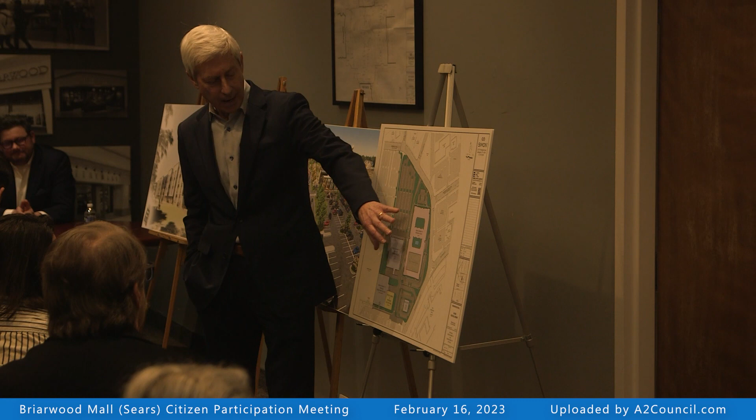So that is our concept. Pretty straightforward, but we're really excited about bringing these new uses to the mall, and we think it'll be a good complement for the property, and we think it'll be good for the community as well.

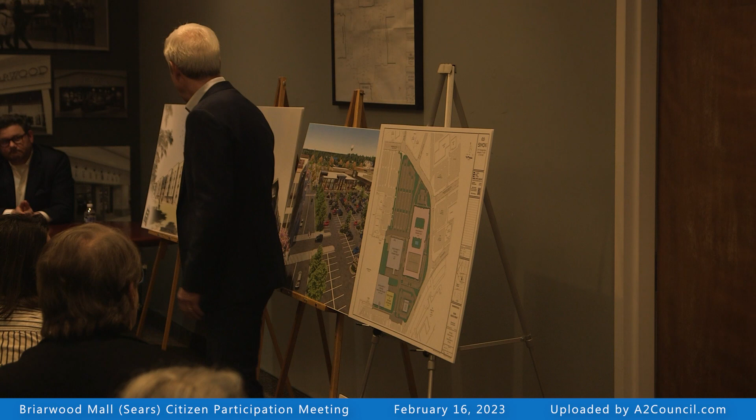What we'd like to do now is just field your questions, and we'll answer them as we can. Some we probably won't be able to answer, but hopefully we can answer most of them between Brad and I and these guys.

As a Hines representative here, we're a developer. We develop multifamily all around the country, and we're excited to partner with Simon on the multifamily piece. So just kind of high level, the grocery and the large format retail, that's Simon alone, and the multifamily development is a joint venture between Hines and Simon together. So wanted to give you a little bit of context there in terms of our relationship.

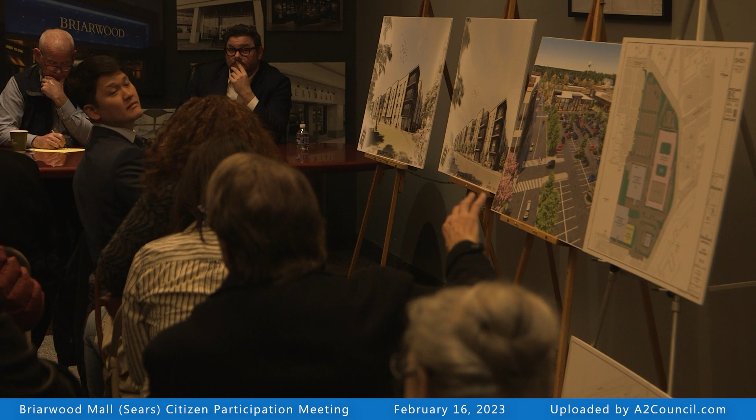Thanks, Brad. The area that's going to be residential is currently zoned parking. What zoning will you seek? We will be seeking the C2B zoning that the mall building is currently that zoning classification. And there's a little flag out to the ring road that's also that classification. So really, it'll be just an expansion of that classification and will reduce the parking designation.

The one change to the traffic that is recommended is as you exit Briarwood Mall on Hilton Boulevard, right now there's two exit lanes, and it merges down into one before you hit State Street. What's contemplated is to create another right out. So instead of one right out on State Street going south, it'd be two rights out on State Street going out, to try to relieve some of that.

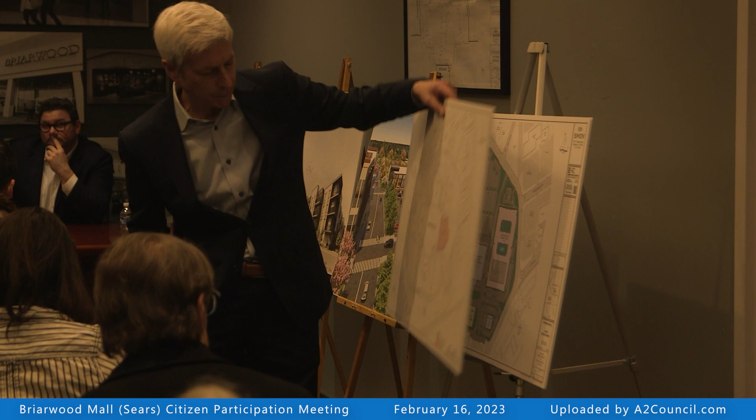So right here, as you're going eastbound on Briarwood Circle, there's two lanes that merge into one, and we're gonna create a second right out here to alleviate some of that wait time there.

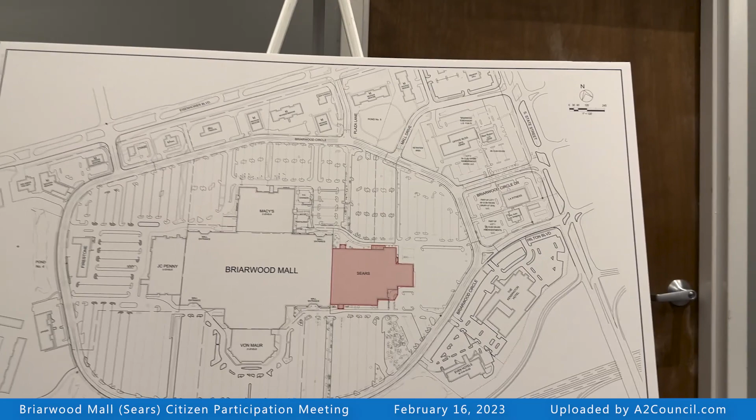What's the car volume you think is coming into the mall? Right now, the struggle is with where Kensington is and where the Mexican restaurant is. At Christmas time, those cars are backed up. Any given night, if you stand out there, they're backed up past where the original Sears entrance was.

So now you're gonna add in, I didn't hear the first part of how many homes are gonna go in, you're gonna add in large retail, restaurant operation, and so on. And with State Street now being bottlenecked the way it is, there's gotta be some correlation, or somebody's working with them to change the entrance and exits of State Street. Or else the traffic coming into the mall is gonna bottleneck, even just getting your own customers in, frustration points, or not frustration points, but critical path.

Yeah, we hear what you're saying, we'll address that, and we have a traffic report which will be available. But we feel, the report says, and we feel confident that the level of service will be substantially the same with that one modification.

Questions? Actually, a couple of questions that are sort of interrelated, and I think impact on the timing of this. There's the Sears parcel. Who owns that now? And the parcels that you're looking to develop, will they be split, or are they already split? And further related to that, I assume the whole mall parcel project is subject to some kind of declaration or reciprocal easement agreement, and what kind of controls do the other owners have for the Mother May I that you'll need to change the uses here?

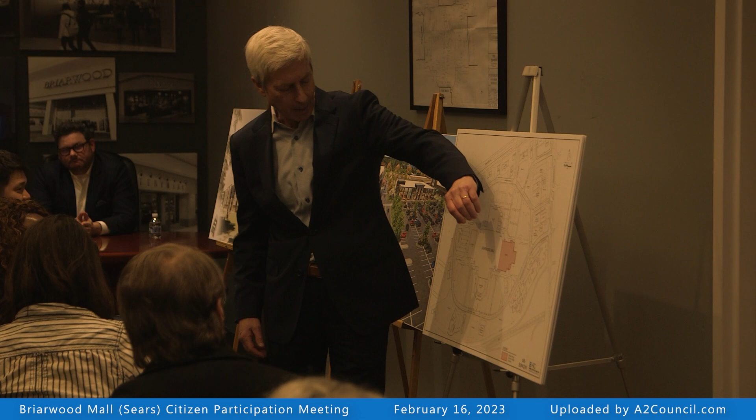There's several property owners on the site. Simon owns the mall building, and now the Sears building and tract. We own some property down here and some property up here. Macy's owns a parcel, Penny's owns a parcel, Von Maur owns a parcel. And then the mall entity owns a parcel.

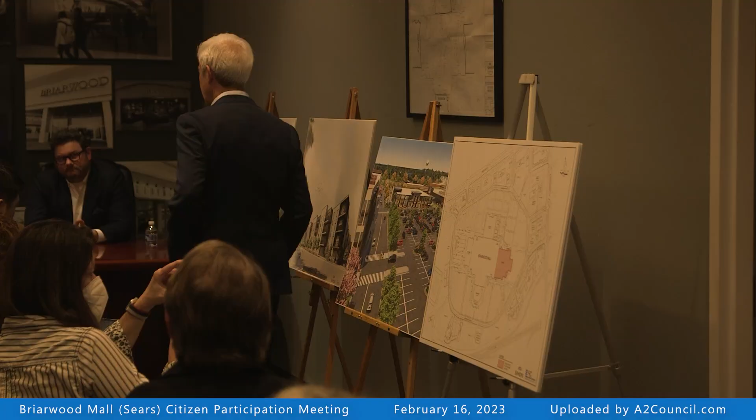So there's a lot of property owners, and you're right, there's a reciprocal easement access agreement in place, where we will have to go to the department stores. We're in active discussions with them now, and everyone wants to see this happen, right? Because this has been vacant for several years. So we will have to work out those private contractual things with them, but that's something we'll be working through while we're working through the entitlements for this project.

So hopefully the other owners have kind of reached the pain point where whatever you might have to cross their palm with would be lowered or go away. I mean, that's all. Yeah, so Simon has a lot of malls, and we've got these same folks in a lot of our malls. So it's like a three-dimensional chessboard, it all gets worked out in the end.

And I think you also asked about the timing of things. So assuming, we're starting our entitlements tonight with this meeting, and then we'll get your input and provide feedback to the city when we submit a site plan application. But we're hoping to get through the entitlement process, which is the site plan application and the rezone, by the end of the year. Don't know if that's optimistic or not, but we think it's realistic.

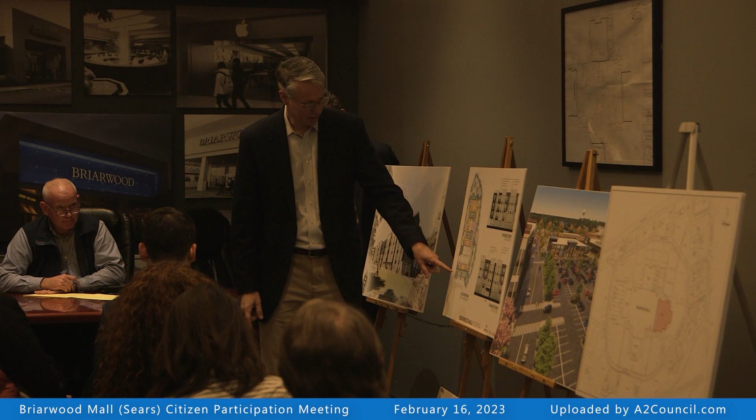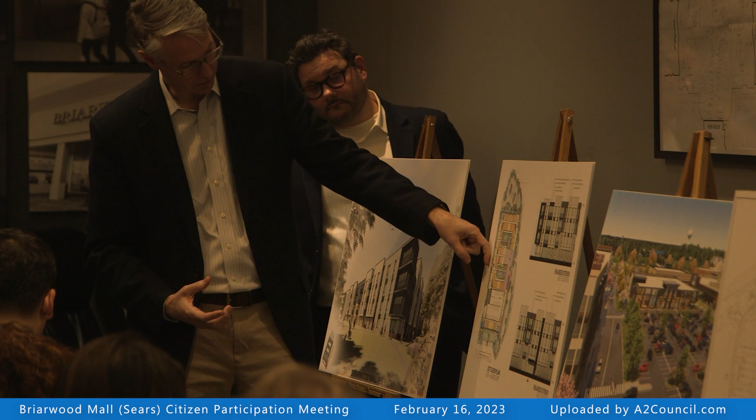We're focusing a lot on our landscape architect, on the green space and the experience. Obviously we're here next to a mall, next to the ring road, and there's a lot of automotive traffic, so we want to make sure there are great walking paths and access for pedestrians as well as bicycles. We're contemplating a bus route, thinking about how Ann Arbor Transit supports the mall area so it's thoughtful in terms of the route they take—we're talking about a bus stop between the grocer and the multifamily. So we're trying to think about all modes and all ways folks will use the site and the development, and just being thoughtful about that.

As to the residential, so it's apartments, not condos. Correct. And it's geared toward multifamily as opposed to student housing, which we've seen a lot of in the central core. Correct. And what are the general sizes of the apartments and the price points?

Lastly, have Simon and Hines done anything like this together before? Good question - it's the first endeavor, isn't it? I think it is officially. We have a couple of different projects around the country we're working on, but yeah, this is the first. Simon's doing this in a lot of our malls now, rather than replace a department store with another department store - that universe of available department stores is shrinking. The guys that lease the mall now are saying they don't want more of the same, they want something new and a little more dynamic.

We've done this in a couple places, but where we have available inventory of vacant anchors in the market, and the market's there for it, this is the way we're going pretty much. Any idea on price points for rents?

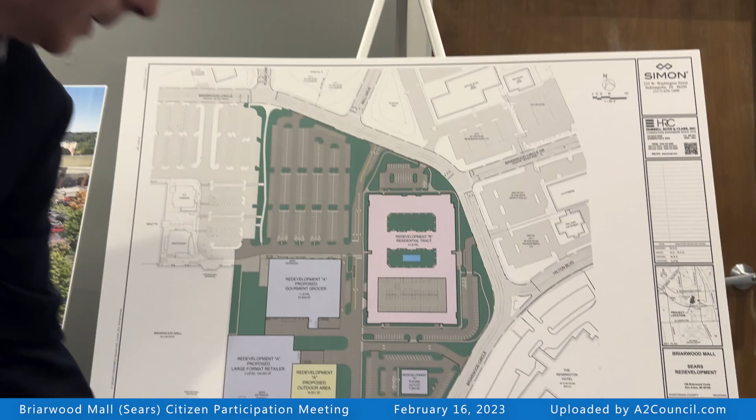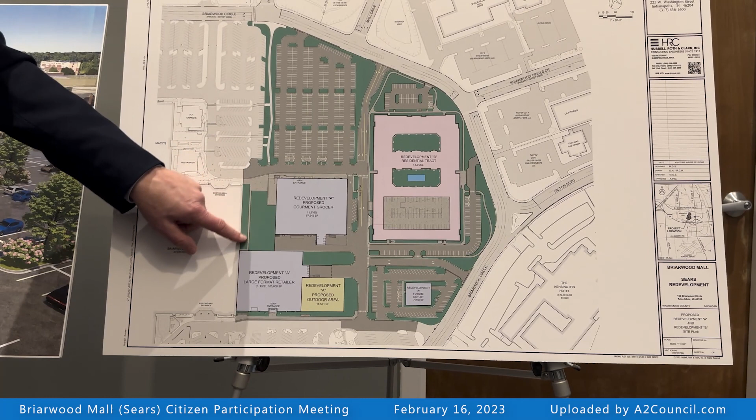So the Sears building used to sit here. This retailer is going to have an entrance right from the mall inside, and then there's going to be this exterior—this is all exterior. What we've done is we've exposed this GLA, and that's an excellent opportunity to have this retail that's inward facing now become outward facing and activate the street space. That's an opportunity we've afforded ourselves. But that's really the extent of it—when we find the right tenants for that and turn them outward, that's really all we're going to do to touch them at this point.

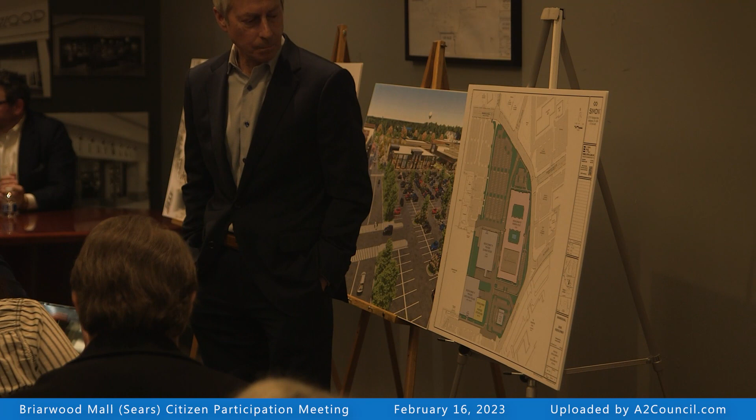Is the residential intended to be built in a single phase? Yes.

Is the mixed-use concept specific to Briarwood, or are there other models around the country that Simon is working to redevelop in a similar manner? We're working to redevelop in a similar manner. I'm involved in a mall in Edina, Minnesota, a suburb of Minneapolis-St. Paul, which reminds me a lot of Ann Arbor, and there we're doing this exact same thing. We built residential, and we were also repurposing—in this instance we're not taking the building down, we're repurposing it into a grocery store and an entertainment venue. So not every mixed-use development will have those components, but we're looking at doing this wherever we can.

So you guys haven't done one yet, but you're in the process of doing a few different ones? Correct, well we just finished one.

It's not directly analogous, but down in Atlanta, in Buckhead, we took down a department store and three levels of parking underneath it, and built the parking back. In place of the department store, we put an office building, a food hall, a Lifetime Fitness, and a hotel. It's really market dependent on the available anchors. Unfortunately, some malls have one or two anchors that are empty, and we can't get there with something like this, but this is a great market, so we had plenty of interest from Hines and others.

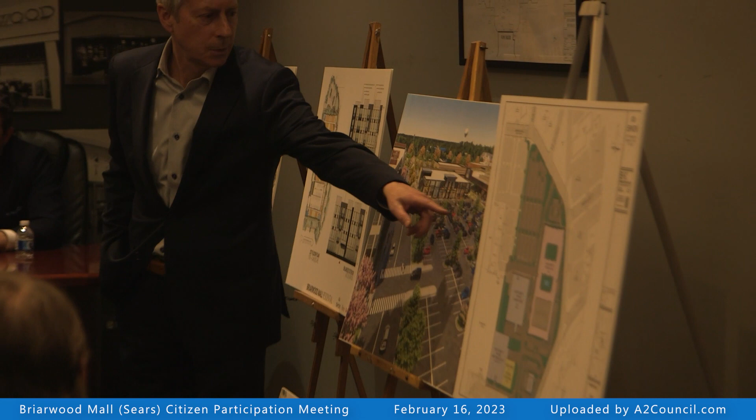This is the grocery, here's the entrance by Chipotle and CPK. And then all this can be activated, and we're creating the new mall entry I mentioned back there. So you'll be able to — this green space is something that we can hopefully activate, and we can do community events there. So it'd be a cool space.

I think just one other thing I would mention is that since then, we've also paid attention to the TC1 zoning and the idea of what the State Street master plan is. So this is trying to engage that as well from a kind of urban perspective that the city has mandated across the city.